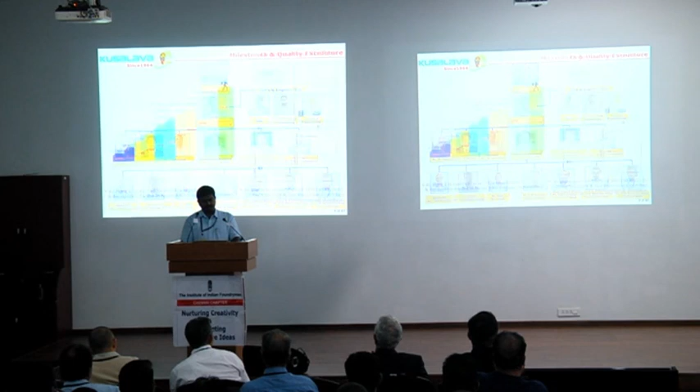Regarding milestones and quality excellence, from the beginning we have been very much oriented about quality. In 1994 itself we got the ISO certificate. Now all our plants are IATF certified, and we are an ISO 14001 certified company. We also have Lloyd's registration certification, and we have in-house R&D for process development, which has been certified by the Government of India.

Now I'm just going to explain how we make these cylinder liners. We use different materials. Basically, it is foundry grey cast iron - class 30, class 40, class 50. These are the grey cast irons what we do. Also, you can see many microstructures, which are very important for the foundry.

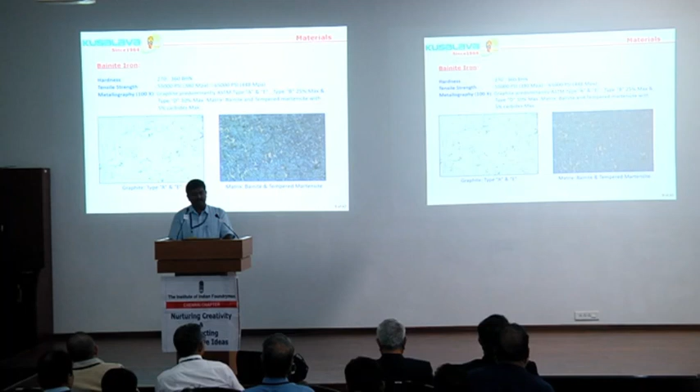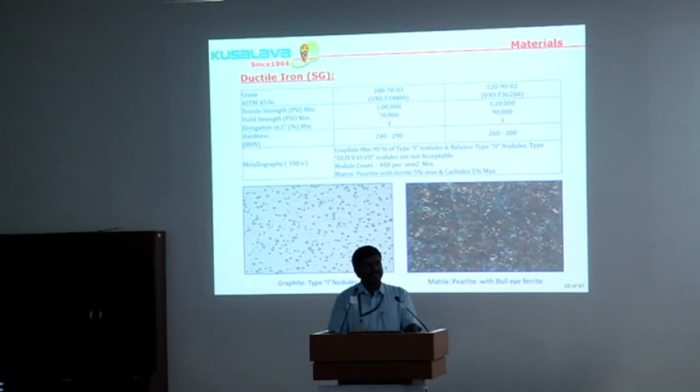We also do some liners with bainite iron. It is a different grade of iron where we maintain alloyings like moly and nickel, which gives high hardness and good wearing strength. And we do ductile iron, SG iron liners, what we call SG iron liners.

These liners we supply to one of the US customers for racing car application, called drag racing. For each race, they have to change the sleeve, that is the liner. So we developed the liner in such a way that the same liner has been useful for 4 racings. The customer was very much delighted, and we became the single source for him. We supply only 5,000 numbers, but it is a very high value item. That is the Darton sleeves in US.

And we do some steel liners. Volume wise it is less, but we do a lot of variety of liners. As part of that, we do steel liners for some of our export customers.

Now I am going to explain the foundry process, how we do the casting process. Basically, it is centrifugal casting. If you see the basic flow chart of the casting process, we have raw material bins where we maintain different compositions for different customers. We transfer the raw materials through a charger or magnet to the furnaces, and we do induction melting using Inductotherm induction furnaces.

Then we do the spectro check. Then we have the carousel machines where we use water cooling as well as air cooling. Then we do some refractory coating into the mold to avoid metal to metal contact. Then we do the pouring. Due to the centrifugal force, the casting will be formed, and we do the casting extraction. Then we do some shot blasting, casting inspection, then parting. So this is the typical foundry process flow we follow at our factory.

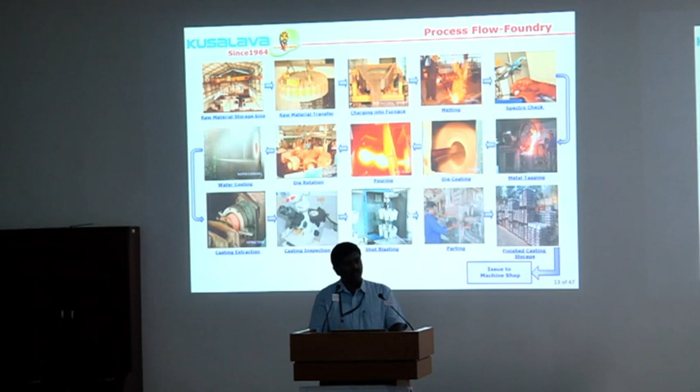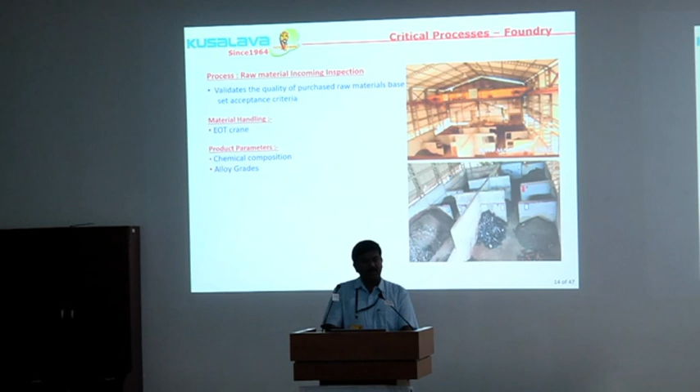These are some of the critical processes in the foundry. Raw material bins, even though it is storage of raw material, is very important for us. There should not be any mix up with different materials, because one customer doesn't want any nickel in his composition. That's why we maintain different bins.

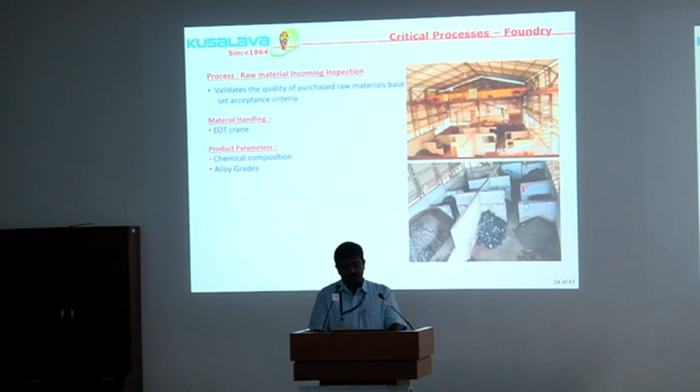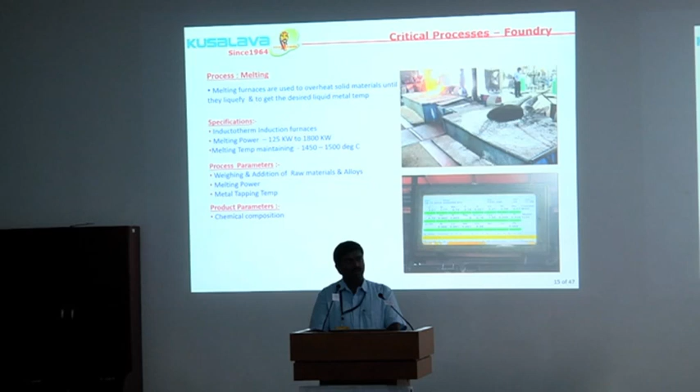Also, as I told you, we use induction furnaces, and we have an online display at the furnace which is connected to the spectro lab. Once the inspector does the check in the spectro lab, the readings are directly displayed at the furnace, so that the melter can release the hot metal for pouring. So we have the online display system.

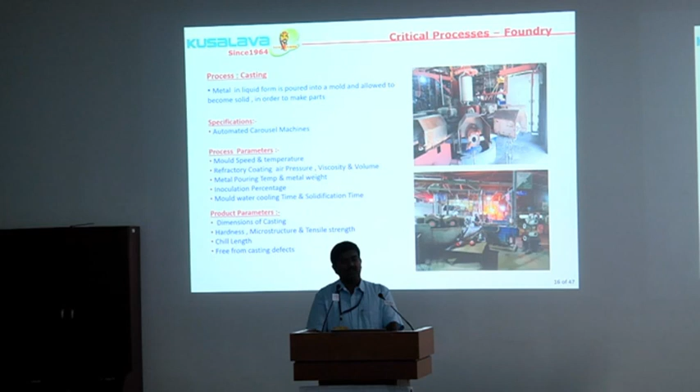This is our casting process. As I told you, we have automated carousel machines where we do the pouring. It is very important for the microstructure, hardness, and all these defects - the casting process is very important for us. Then after casting, we do shot blasting and then parting, which is part of the casting.

These are the testing equipment we have in our plant. All the testing equipment required for casting, we have in-house. We have two spectro labs, and we have image analyzers and hardness testing machines for component checking.

And these are the critical characteristics, what we call it as customer. Sometimes he will give the critical characteristic for any liner. If customer doesn't specify, but we have our own critical characteristics which really affects the fit and function of the liner. So based on our experience, we identified chemical composition, hardness and microstructure is very, very important for a cylinder liner manufacturer.

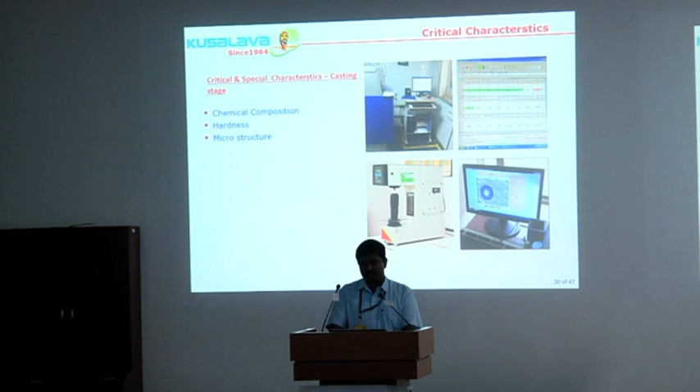So these are some of the process control. Foundry, we cannot check 100%, we cannot do any destructive testing. So we have to maintain the process control. We have a lot of process controls in our foundry.

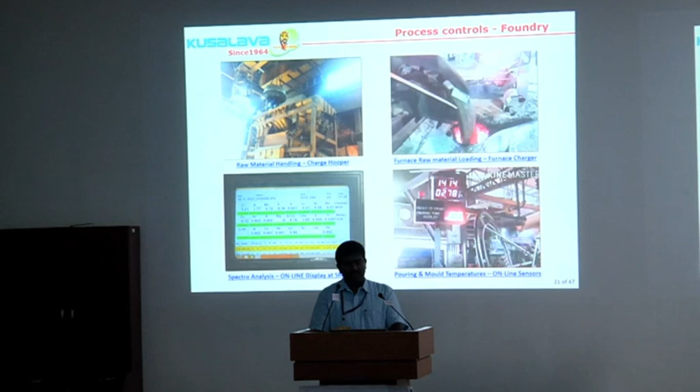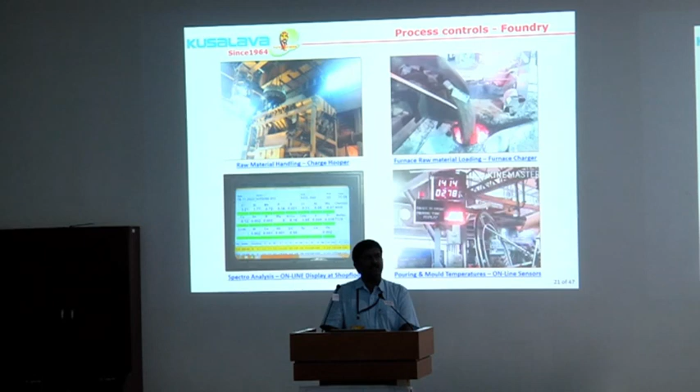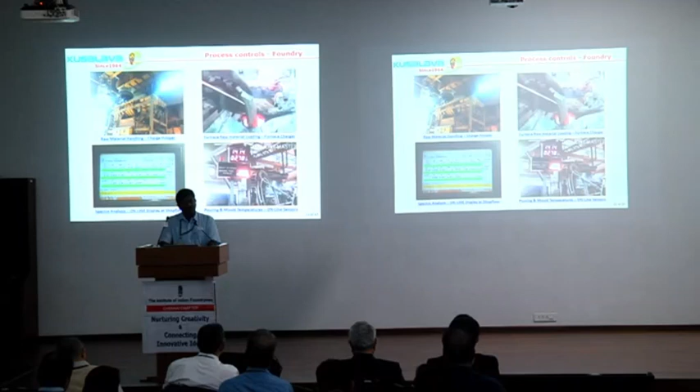One is inoculation addition. Normally people do inoculation addition manually, but we have online screw feeder. We load the inoculation in the screw feeder. During the carousel machine operation, as a part of PLC program, once it comes to that particular station, inoculation will be automatically added through the screw feeder. And also we have online die temperature, online metal temperature, online RPM meter. All these things we have online, so we are very much confident about our process control.

You can see any pouring also, we do automatic pouring. No operator intervention in the pouring, because pouring time is very important to maintain our casting defects. So these are some improvements we do. We have automatic casting extraction, and also automatic die cleaning, because manual cleaning is always a problem. If the operator is not cleaning the die, we will get casting defects. So we have automatic cleaning also in our foundry.

So this is a brief about our foundry process I want to explain. And then coming to the machine shop, we do a lot of machining. Along with the casting, we do a lot of machining. So this is the typical machining process flow.

After getting the casting from foundry, we do some rough machining, rough boring and rough turning, and then some CNC turning, then we do grinding, then we do honing, and at the end of the line we have the inspection, and then after inspection we do laser marking, and based on the customer packaging sign off, we do the packing of the parts with returnable pallets or with regular pallets.

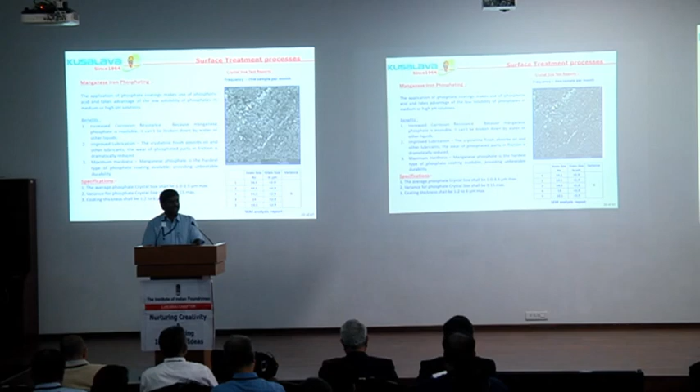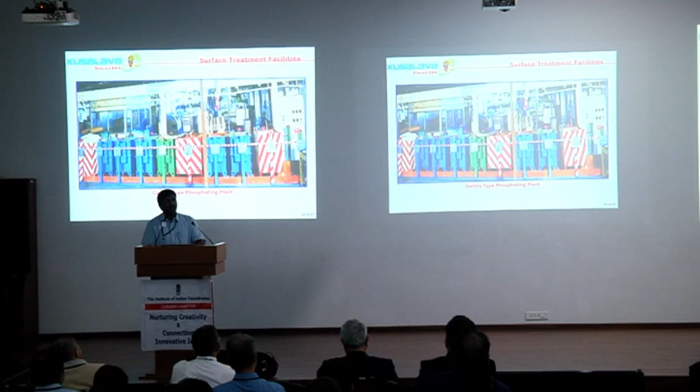And quickly I am going through the surface treatment process. We do some surface treatment for some of our customers. So we do phosphating, we call it manganese iron phosphating. We do phosphating to retain the oil retention as well as to avoid corrosion. This is the 10 tanks phosphating - there are 10 tanks which we use to do the phosphating with proper PLC control. And we do through hardening, tempering and annealing, stress relieving, and induction hardening.

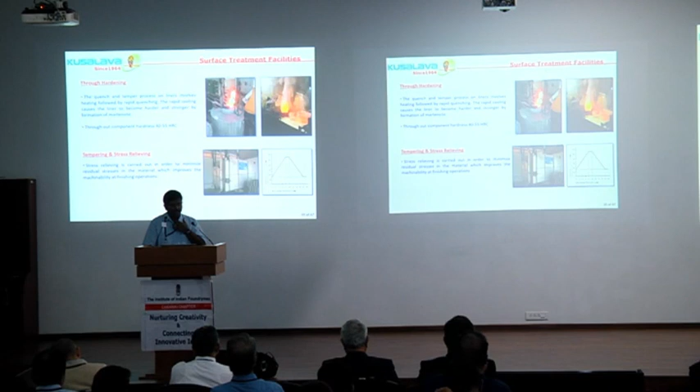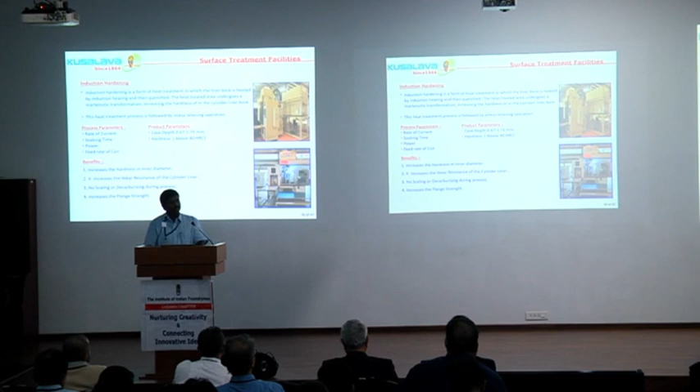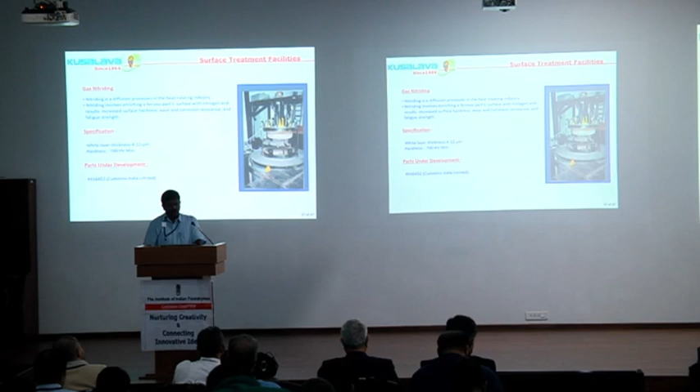For some of the export liners, we do induction hardening which gives the case depth. The liner ID will be hardened, and we maintain case depth, and hardness will be very high during engine running. We also do a small quantity of gas nitriding liners, for our overseas Cummins customer. And then chrome plating - very few liners we do chrome plating on.

This is one of the important operations - roll burnishing, also called deep rolling process, which we do under the cylinder liner flange. This increases the strength of the flange. In high load engines, collar breakage is a normal phenomenon for cylinder liners, so to have that collar strength, we took this technology from one of our US customers and developed it through collaboration. Now we are doing many liners with this deep rolling process.

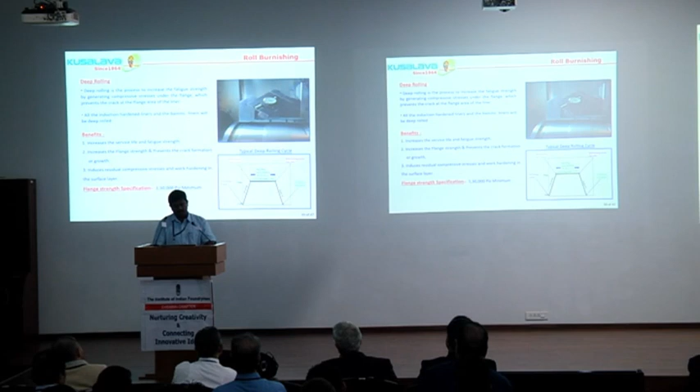Normally for all the critical characteristics, we are able to achieve a process capability of 1.33 to 1.67.

Coming to the challenges we face and how we are addressing them - our industry is highly labor intensified. Even though we are doing 400 crores, we have a manpower of around 2,000 employees across all plants put together, so very high labor intensity. Also, due to recent raw material increases, customers have supported us to some extent and we've made improvements, but even though the market is very good, we are getting very thin margins. That is a challenge.

Casting quality is another challenge - sometimes we use refractory coating, and the suppliers are here, so sometimes we get inconsistency which affects our casting quality, causing a sudden increase in rejection. We need to call the supplier, so we've developed 2-3 suppliers, and now existing suppliers are also performing very well.

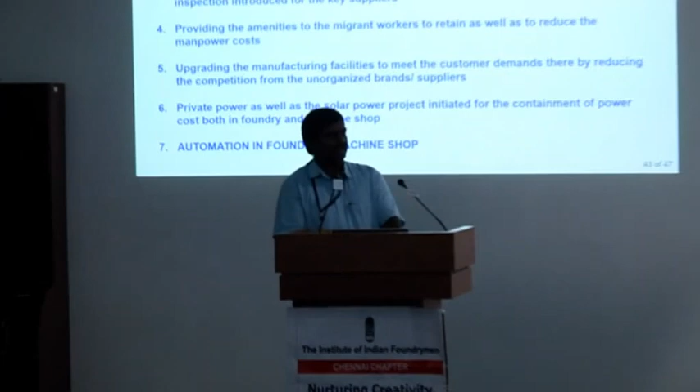And the third one, maintaining the manpower. You can't believe, until 2 years back we didn't have a single migrant worker in our factory. We ran our factory all with local manpower. But the last 2 years, because of government schemes or the nature of work, no local person is willing to join the foundry.

So what we have done is start taking migrant people from Bihar or Orissa, and we give them a lot of amenities. We have put up employee quarters, we keep them there, and give all the facilities, free lunch, and whatever amenities needed to retain them. We are taking a lot of initiatives to retain them, because without manpower we cannot run many of the operations.

We saw this during the Corona period, when government allowed only 50% of manpower. If I'm taking only 50% of manpower, I cannot allocate all the people to all the operations, because skill is also an issue. That's why manpower is very important, so we are taking a lot of activities on this.

We are also upgrading our manufacturing facilities to reduce the dependency on manpower. I will show you some of the next ones.